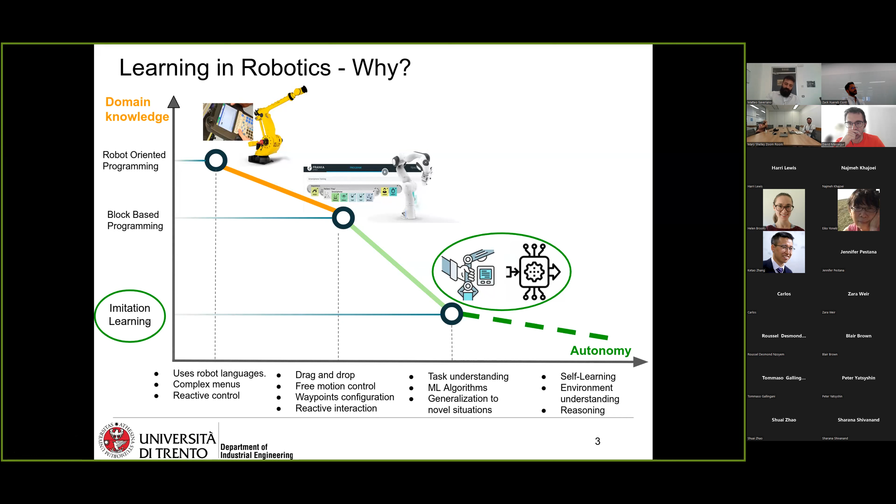This is basically the domain where learning starts to be fundamental in order to increase autonomy without increasing the domain expert knowledge. In this area, I place myself in the imitation learning community, also called programming by demonstration in our field. So then why geometry aware imitation learning?

Well, the answer is pretty easy. We are dealing with robots, and there are many types of data in robotics that do not belong to the Euclidean space. Position is the typical quantity you can treat as Euclidean type of data, because it is, but already if you move to orientation, then it's not anymore. Orientation lives on its own space. Similarly, you have other quantities like inertia, impedance, and manipulability that belong to symmetric and positive definite matrices.

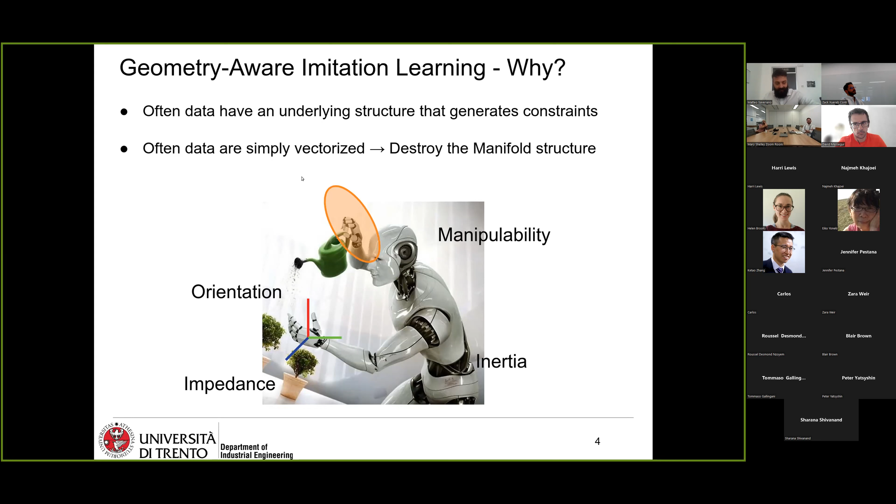What was in the past, at least in the imitation learning community, the way of dealing with learning and retrieving from this data was, okay, let's just vectorize this data, and then we do some post-processing in order to restore the geometric constraint or the manifold structure that a very raw vectorization of this quantity will, of course, completely destroy.

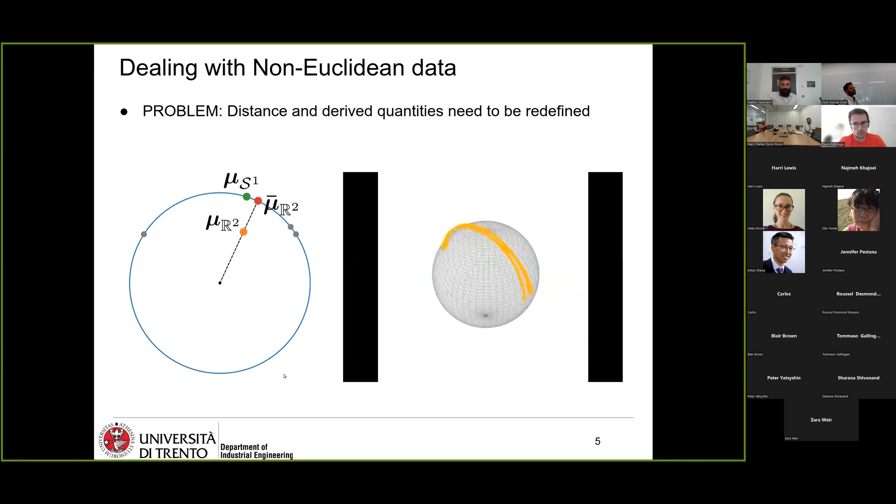To better understand this, we have a small video example here. Let's assume that our points live on a circle, this blue circle here, and then we have these dots here, the gray ones. We want to compute something simple, the mean, indicated with mu, which is the basic of many probabilistic-based approaches in machine learning.

Then what happens is, if we calculate the mean treating these points as belonging to R2, the Euclidean space, more or less we end up here. And then we can simply realize that this point is too close to the center of the circle to be a real one. So what we can do, we can rescale this point, pushing it back on the circle where originally it was.

And then we end up here. But if we calculate the mean using a proper concept of distance that preserves the fact that these points are on this circle, we may end up here. So every time we treat Riemannian data as Euclidean, and then try to do some post-processing to push back on the manifold, we introduce some inaccuracies.

And of course, if this is used to generate robot trajectory, and we propagate this error through our algorithm, we end up with something that may easily go out of distribution very quickly. So I show the video again here, and you see the problem is this: two points in the Euclidean space, or two trajectories are here, and if they have to stay on the manifold, we have to deform the space in order to let them work on the manifold.

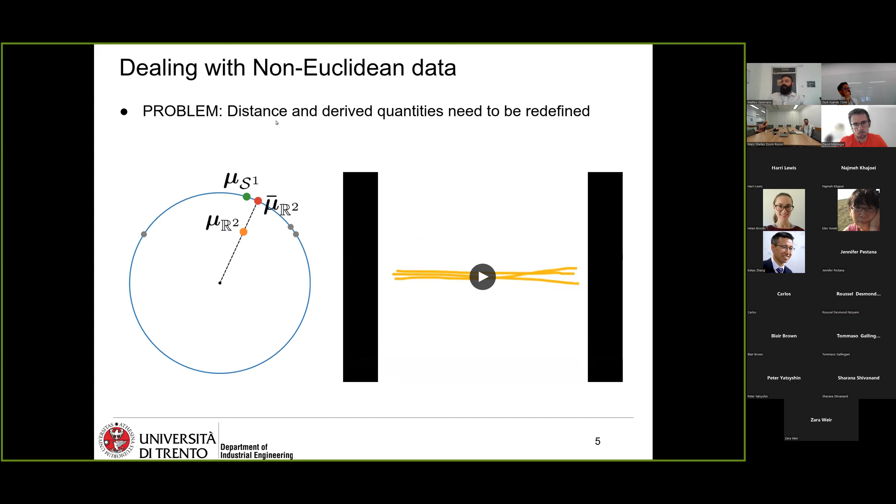So this means that if we want to properly deal with Riemannian data, we should redefine, first of all, the concept of distance and use proper Riemannian distance and all the derived quantities. So the solution is to use the proper tools that have been developed by mathematicians in the framework of Riemannian geometry, also called sometimes differential geometry.

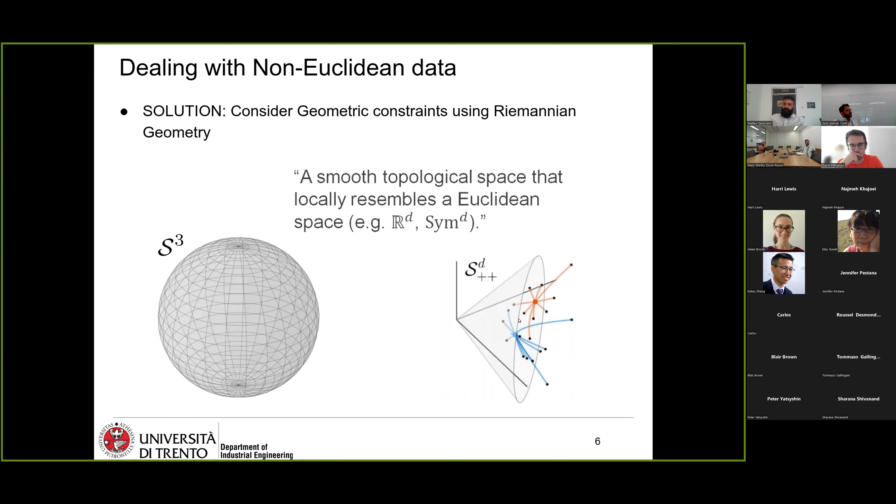A Riemannian manifold is a very general concept. It's a topological space equipped with a metric, so with a distance function. The type of distance function defines the property of the manifold, and it's not uniquely defined, but there are some distances that give nicer properties and are predominant in the manifold. Here on the left, you see a sphere embedded in the 3-dimensional space. This is the manifold where orientation lives, and, for example, unit quaternions. And here on the right, you see the cone that contains symmetric and positive definite matrices.

Okay, so let's start giving some elements of Riemannian geometry now in order to understand how we can deal with this data. As I said, a manifold is actually locally isomorphic to the Euclidean space. We can, a little bit improperly, say with an abuse of notation, that it's locally Euclidean, even if this doesn't mean much from a rigorous mathematical point of view, but I think you get the sense.

Actually, on each point on the manifold, you can define the so-called tangent space, which here it's pretty easy to depict, where basically you can define a coordinate frame and treat your quantities as if they were Euclidean. In order to do so, we need some operations that let us move from the manifold to the tangent space and back.

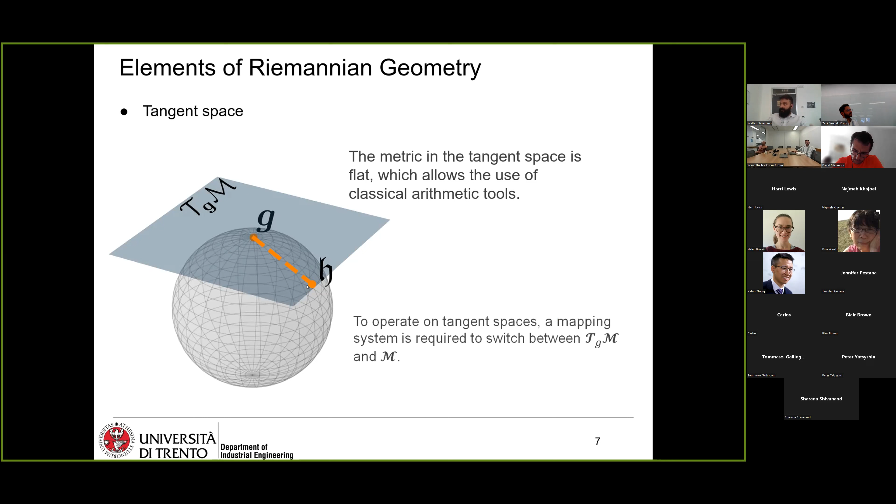These operations are usually called the exponential map and the logarithmic map. The exponential map is the one that pushes a point from tangent space onto the manifold, and the opposite is the logarithmic map that lifts a point from the manifold to the tangent space.

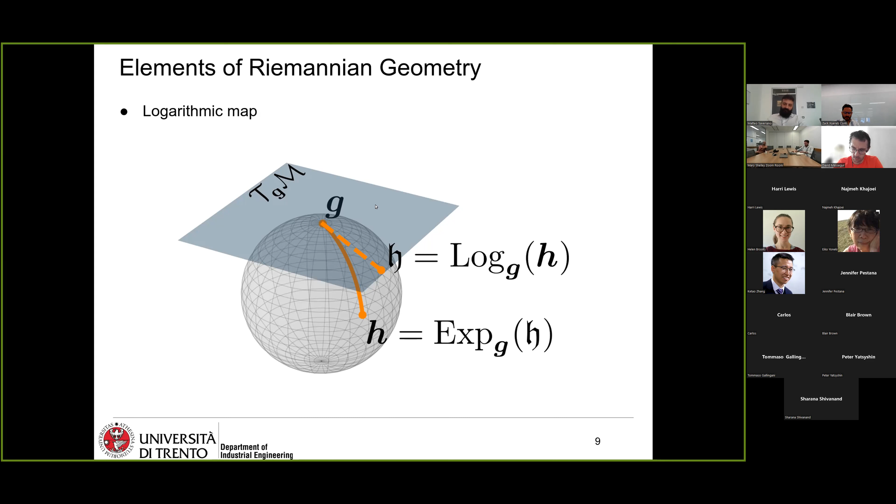And another important concept is that of parallel transport. Why do we need parallel transport? Because actually everything we will build in a moment is based on placing a tangent space at some point, then lifting the nearby data onto the tangent space, using Euclidean tools to learn in the proximity of the tangent space, and then pushing back the data onto the manifold, and then moving on to the tangent space.

And then when we have to compare two vectors that are projected into two different tangent spaces, we cannot just sum them up or subtract them, but we need to move one vector from one tangent space to the other. So in the end, we need all the vectors represented in the same tangent space in order to perform operations.

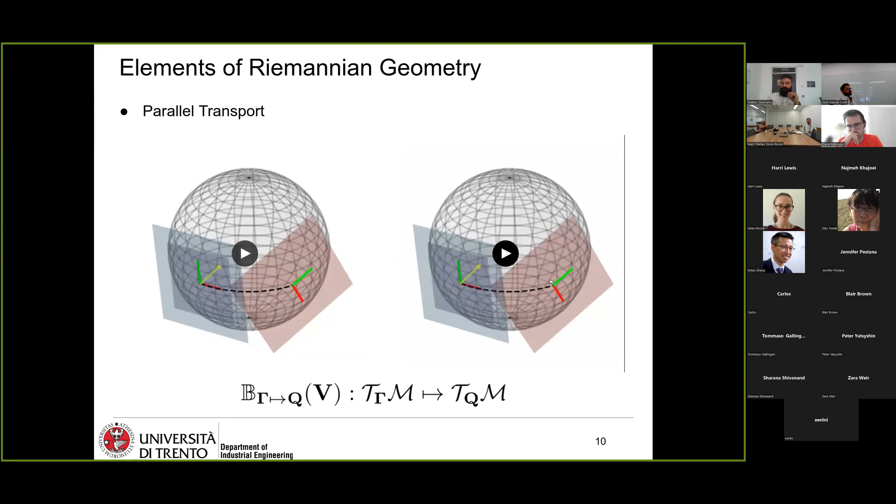Otherwise, basically this happens. Let me show once again. If we just move with typical Euclidean tools from one tangent space to another, you see a vector that stays here is kind of completely changed, while parallel transport is a way to transfer the vector properly, keeping the orientation it has. So you move along a geodesic connecting the two points where the tangent spaces are placed, while preserving directionality. We need this kind of operation, and it can be defined on any Riemannian manifold.

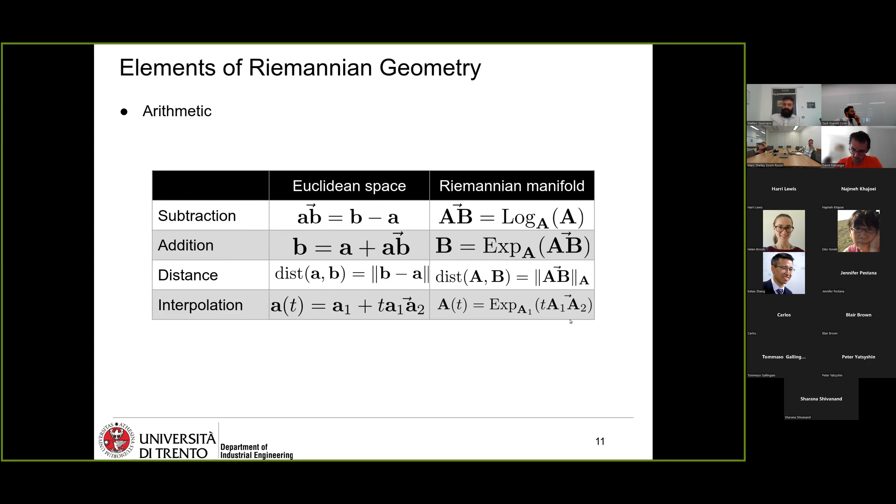This is just to summarize basic arithmetic on manifolds. So the logarithmic map can be related to the concept of difference in Euclidean space. The exponential map is actually an addition, and the concept of distance, of course, has to be redefined to be on the manifold. Interpolation is also important, and it can be achieved through the exponential mapping, multiplying by time t this difference of points in the tangent space.

Okay, so now we have introduced our machinery, the Riemannian manifold machinery. Let's now have a look at how we can use that framework in typical robotic problems. A first example is the famous, at least in the imitation learning community, framework called dynamic movement primitives, introduced in the early 2000s by Auke Ijspeert, Stefan Schaal, and others, working at that time at the University of Southern California.

So what was their idea? Basically, they wanted to reproduce demonstrations and generate something feasible for the robot to execute, so sufficiently smooth—that's why they went to second-order dynamics—and preserve stability, because very often in robotics you want to reach a certain position, a certain configuration, and keep it. So they had the idea: let's start with the simplest dynamics we can consider, a second order spring-damper mass system with unitary mass.

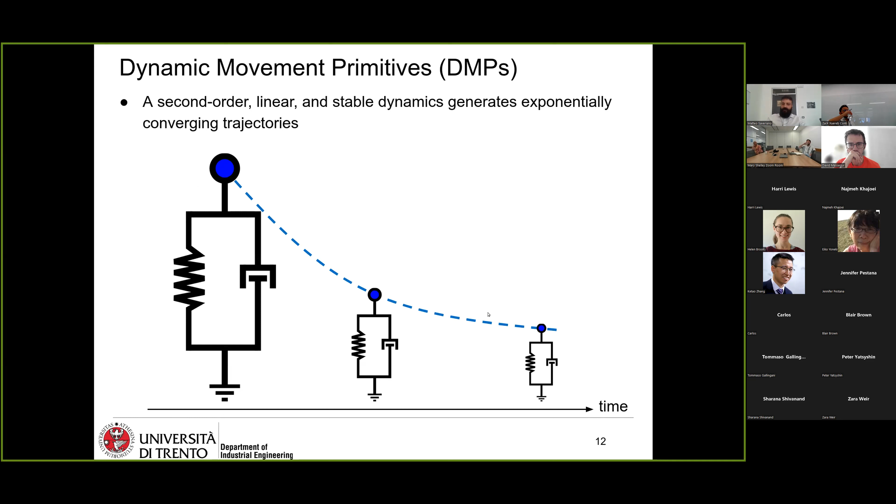This is a very famous physical model. Everyone has probably had to deal with this in a basic physics course. This is second-order dynamics, linear, asymptotically stable, meaning that from each point I can pull this side of the spring-damper system, and sooner or later it will converge. Depending on the value of the spring and the damping, I can have oscillations, or an exponentially decaying trajectory—what we call in control theory a critically damped system—that converges towards an equilibrium.

This is pretty nice, but of course quite limited. So the idea of these researchers was: let's add to this simple system a force, a nonlinear forcing term learned from demonstration, in order to execute arbitrary trajectories, and then finally retrieve asymptotic convergence by killing this force—it's multiplied by a vanishing term, so that with time it vanishes, and the system retrieves asymptotic stability towards the desired goal.

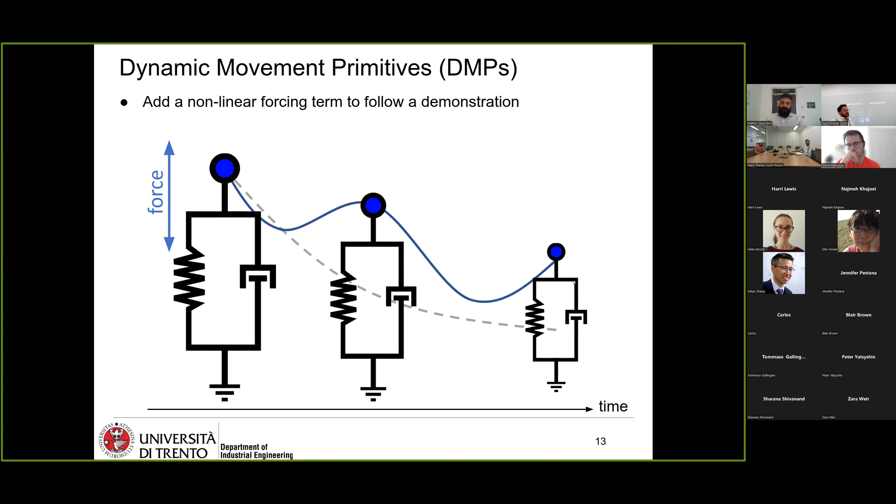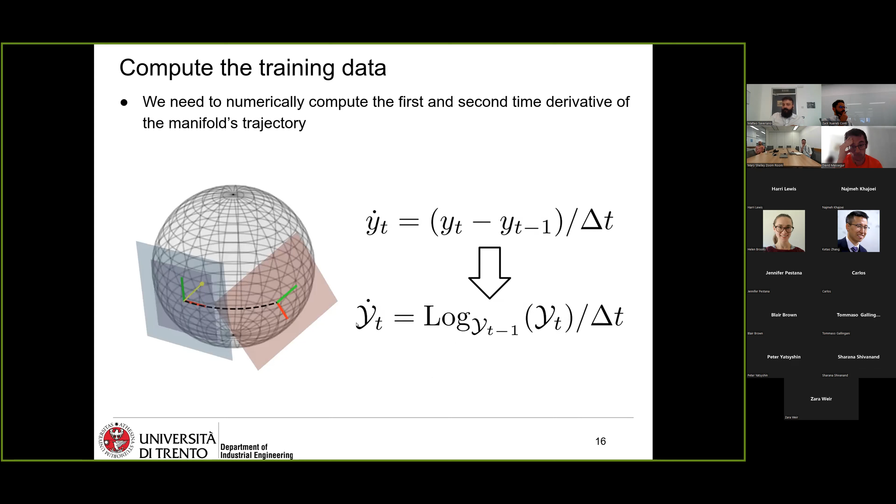Then you can calculate the velocity, and once you have these velocities, you can just apply Euclidean tools to calculate the second derivative, and with this, learn your DMP.

One of the interesting features of DMP is the possibility to change the goal on the fly. Imagine you have a camera tracking an object you want to catch, and you have learned some stereotypical motion, a template trajectory reaching a certain goal G, but this goal is changing on the fly. With DMP, you can define a linear system that, with a time-depending gain, changes the goal from G to the new one smoothly.

The equivalent of this on a manifold is again a dynamical system that, instead of this difference, considers the logarithmic map, in this case placed at G, of G new, and then calculates G dot. You can also change this—the trick here is that you can usually interchange these two for many manifolds, smooth manifolds.

And basically, if you change this one, then you have to do the parallel transport minus the parallel transport thing, in order to interchange these two. So this is where actually the parallel transport comes into the game.

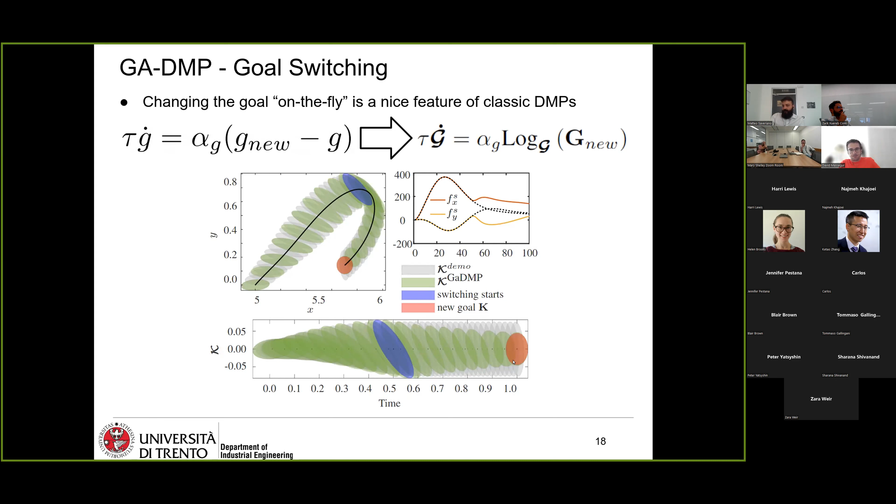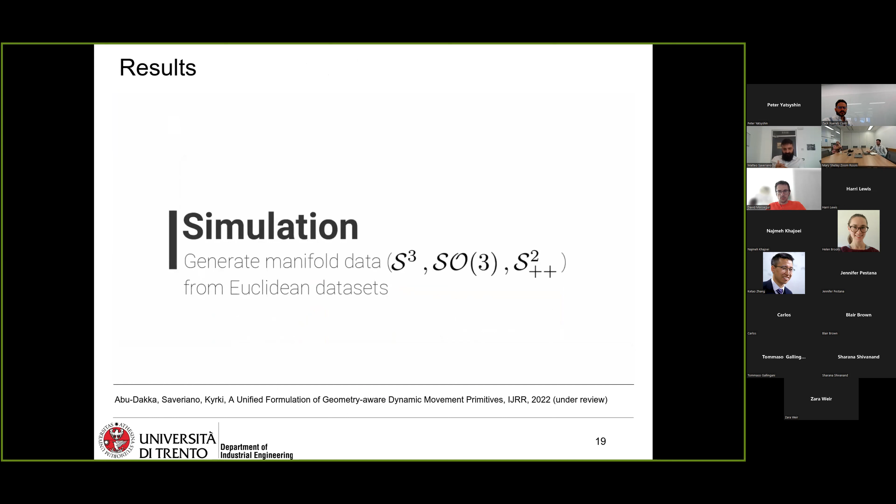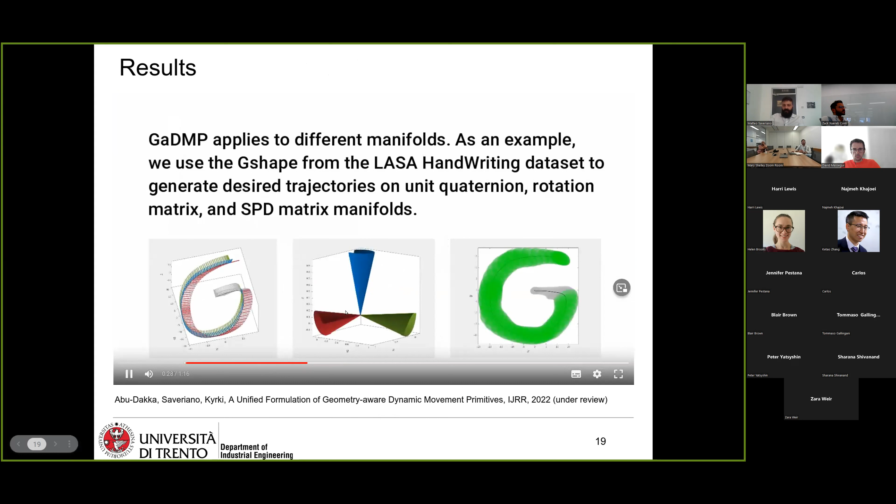Okay, it's time now to see a little bit of results. So we have this paper under review now, where actually we describe what I have told you so far, this geometry-aware movement primitive. So here you see some Cartesian letters, and then we have transformed this pretty simply projected on manifolds. So here on the left is quaternion, here is rotational matrix, and on the right you see SPD matrices. So how you can reproduce that, and then some experiments.

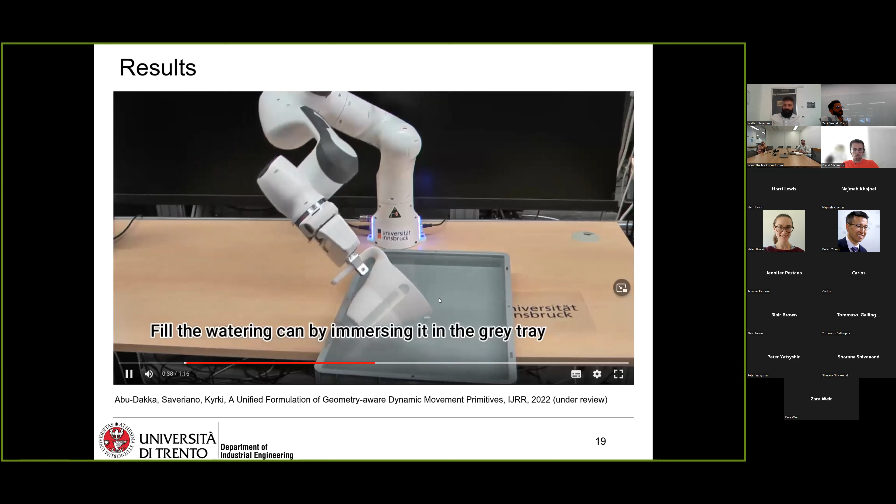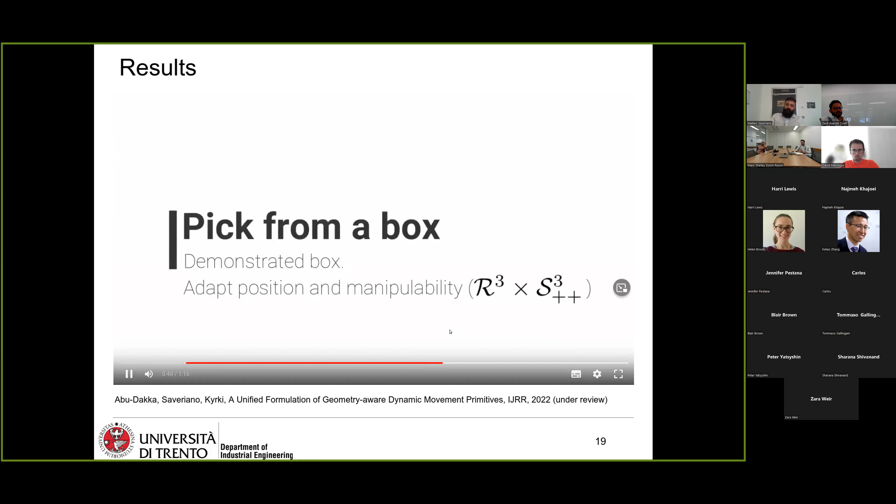So now the robot here, for example, has to fill this watering can, and then it can control basically position, orientation, and stiffness. And in the other case, the robot has to pick from a box.

So we have instructed the robot to actually enter this box. So we control, in this case, the position and the manipulability, that is actually an SPD matrix, as a secondary task. And when we have to enter another box, we command the position. And to prevent that the robot deform the trajectory too much, we have this secondary task. So the robot tries to keep actually its posture, okay? So the posture that has been demonstrated during the motion, in order to do this basically type of motion.

So you see that here, this is the demonstration. And actually, when we try a little bit to generalize, we try to keep the configuration via the manipulability as a secondary task of the robot. And then we have this.

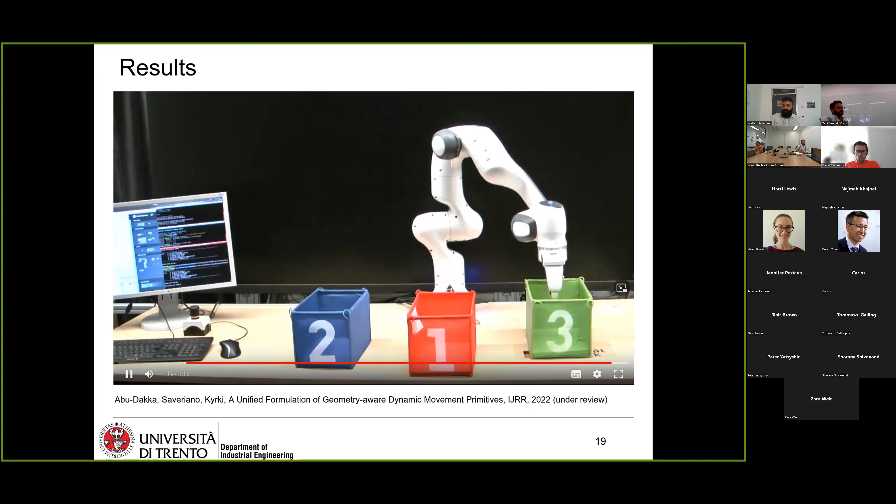And otherwise, I don't know, the robot could, of course, hit the box and so on, because of non-constrained motion.

Okay, so that was basically for discrete motions, so motion that basically have start and end, but many human tasks are of periodic nature. If you imagine, I don't know, sewing, for example, or something that requires that you pass again and again through the same point and generate a periodic trajectory.

Of course, the DMP framework was already extended to consider these periodic tasks. It's formally the same. Now, instead of a clock signal, we have this phase variable that basically goes from 0 to 2 pi and then is reset, so like a sawtooth. And the forcing term is, of course, again a little bit different. So we have R, that is the amplitude of our oscillation. And then here now we have actually von Mises basis functions that basically represent our periodic signal, like Gaussian over a circle.

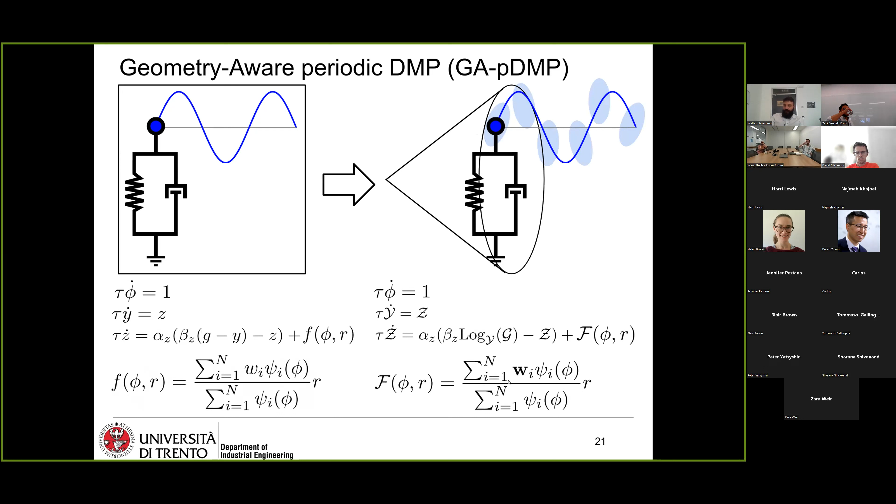And the extension to the Riemannian-based data, it's again pretty simple, just substituting here the difference with the logarithmic map, and all the rest is formally the same. Of course, we have to consider now different types of vectorized data, but more or less the changes are not dramatic.

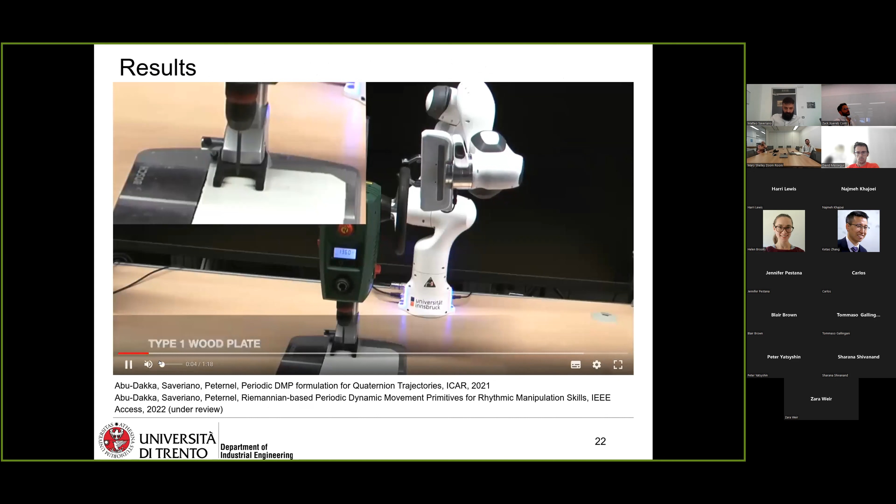Here some results, partially published, partially not, that basically show this is a robot operating a drilling machine. So we have actually shown one demonstration and then made it periodic. So here we control again position, orientation and stiffness to actually guarantee a smooth interaction while manipulating this.

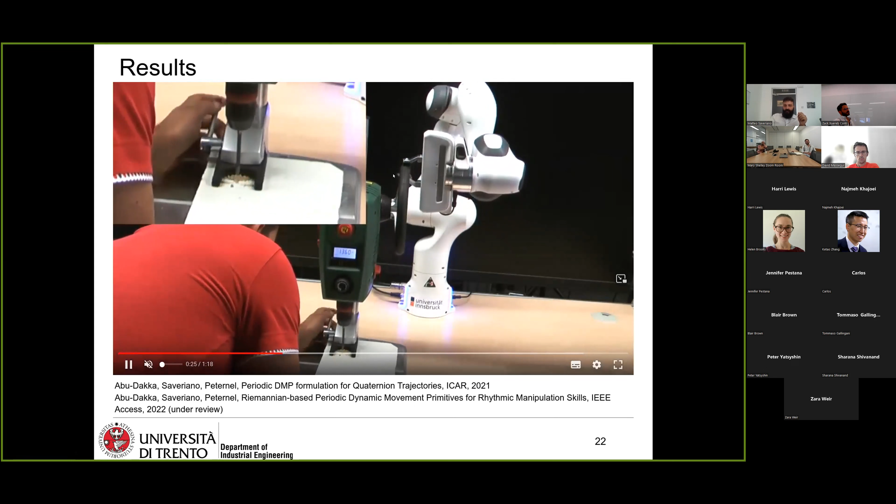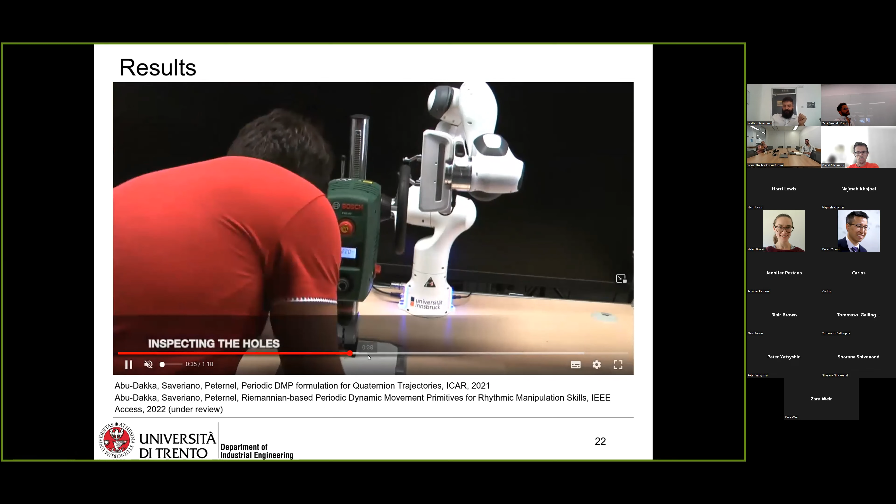So we basically define a variable stiffness impedance controller here, and then we can basically perform multiple holes. And you see, actually it's me now showing the holes and inspecting somehow the material.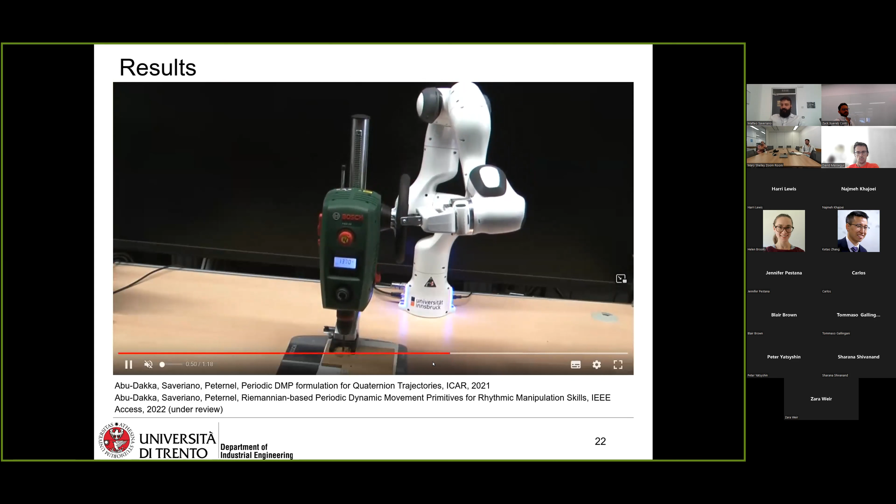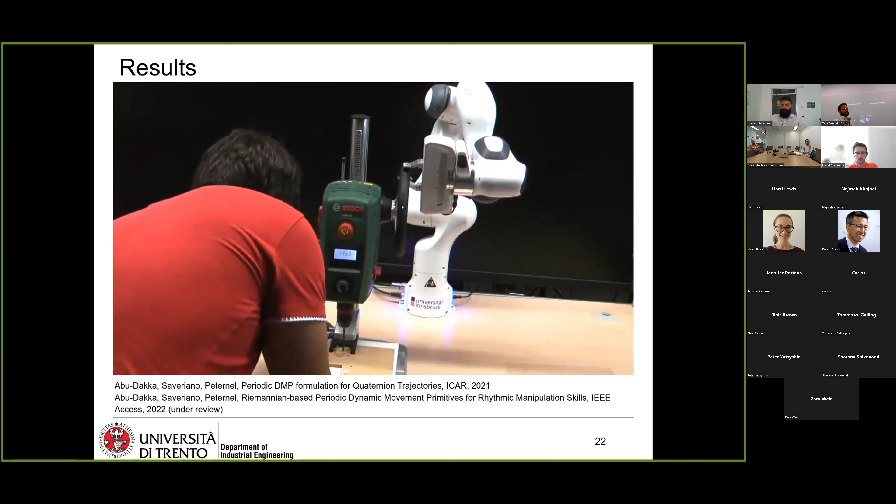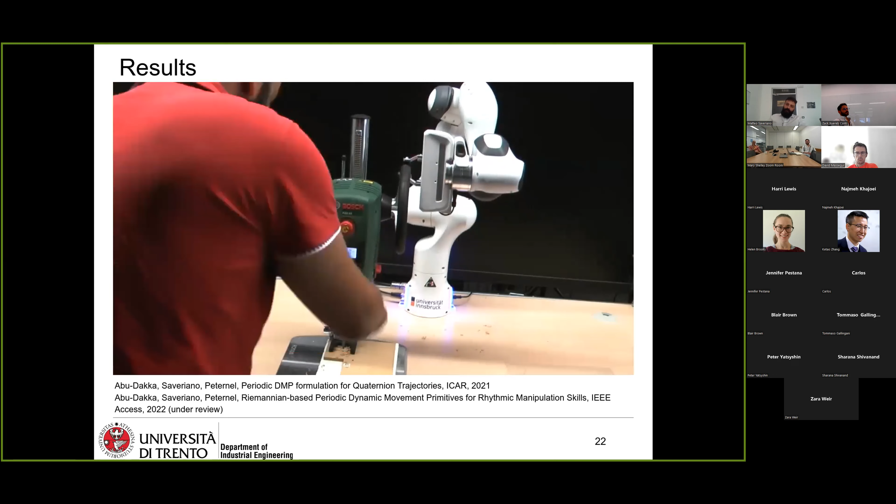We can also change a little bit the material and the thickness, and we have basically a simple estimator, right? So we just estimate the error in tracking the trajectory and try to push more if the error is actually large. So pretty simple thing, and it helps us, in this case, to make holes in a material that is a different type of wood and with a different depth.

So again, we can see that the robot was successfully making the holes.

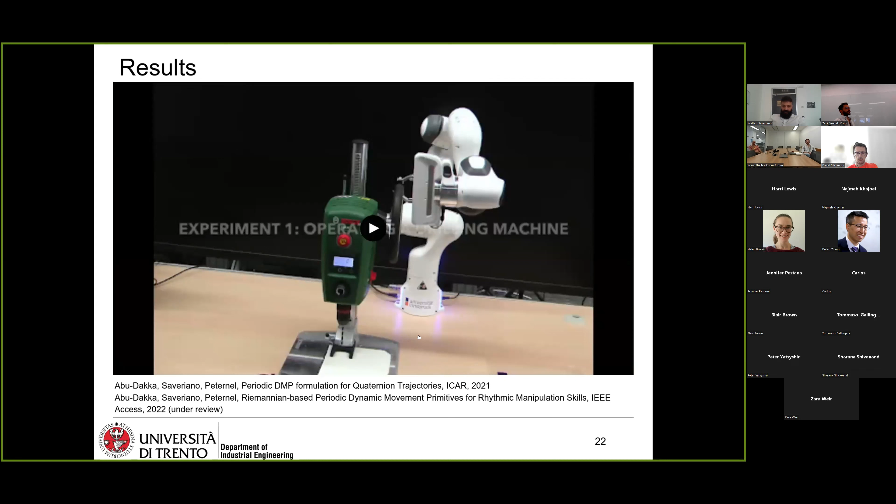Next video, it's a bit nicer. I'll put the audio on again to give you the feeling. This is my colleague, Luca Peternel from University of Delft.

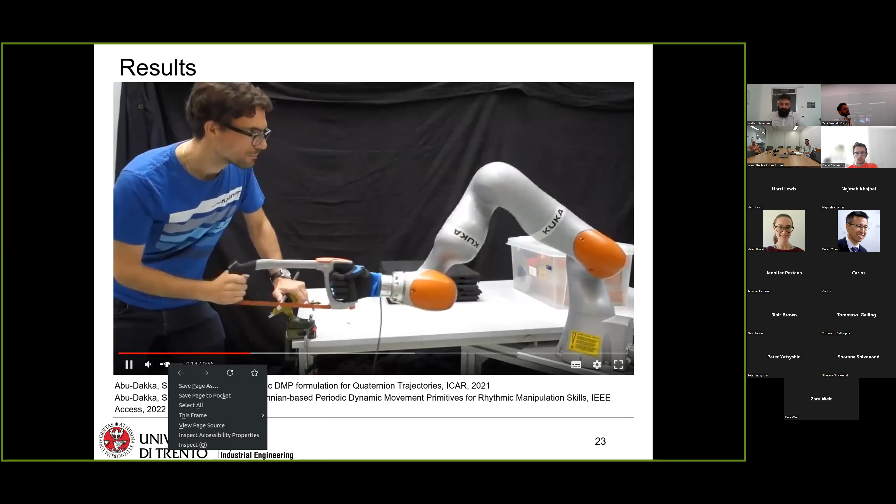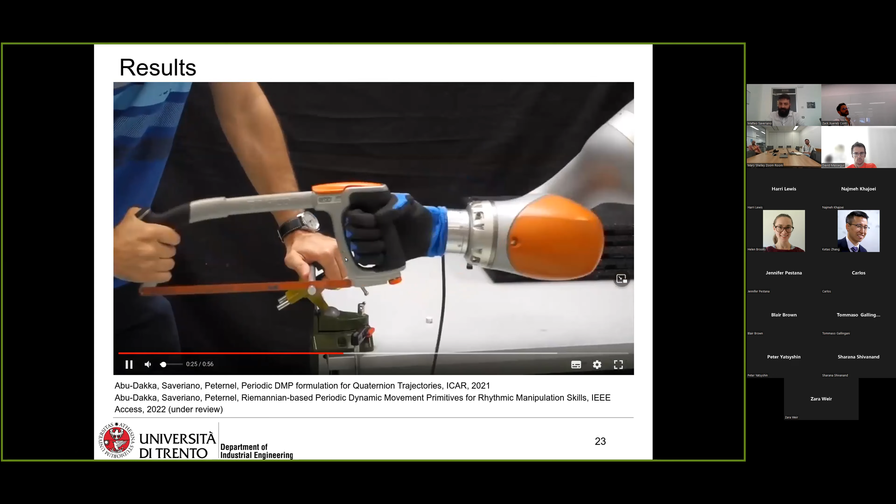You see here we are controlling the motion in this direction and the stiffness in order to effectively do this sawing task together with the human. So push the human in one direction and pull in the other, not being passive.

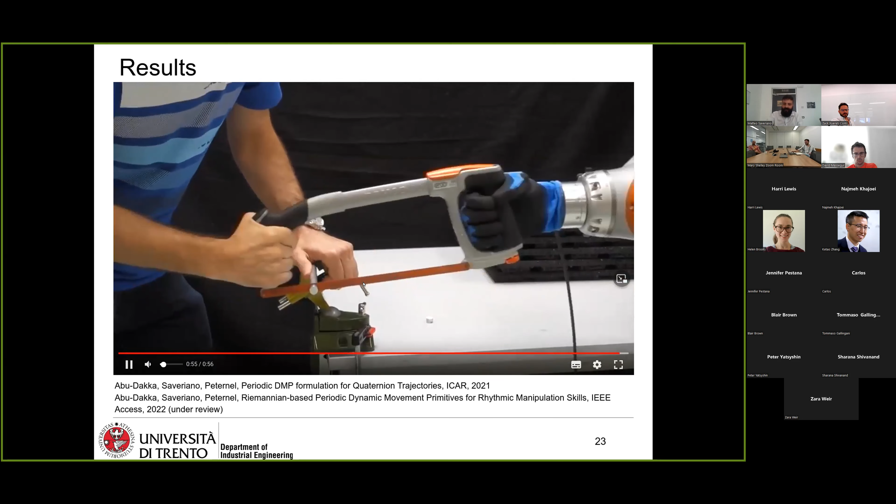In a moment you'll see this was a real task, cutting down this piece of steel together with the robot. Again, this task was controlling the position, but also the stiffness, in order to ensure contact and actually support the human while cutting, not just passively following it.

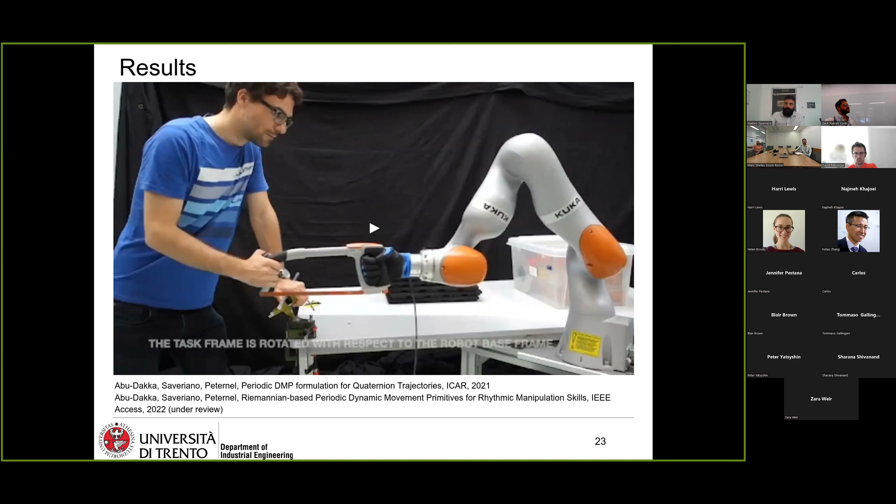Okay, so we're going towards the last part of my presentation. What we've seen so far with dynamic movement primitives is a possibility to learn a time-driven dynamics, where time plays a fundamental role in killing out the nonlinearities in order to retrieve stability. This means we have hyperparameters to tune to get a motion that, in the discrete case, prevents overshoot, or prevents killing the nonlinear forcing term too early so you just linearly converge to your target.

Then in the last 10 years or so, there was a lot of effort to learn stable and autonomous dynamical systems that do not depend on time input to generate motion, where you learn an entire vector field, and potentially generalize into areas of the state space where you don't have demonstrations, because the vector field has a certain shape even far from the demonstrations. The idea is nice, and I developed a few approaches in this field that I'm not going to mention today.

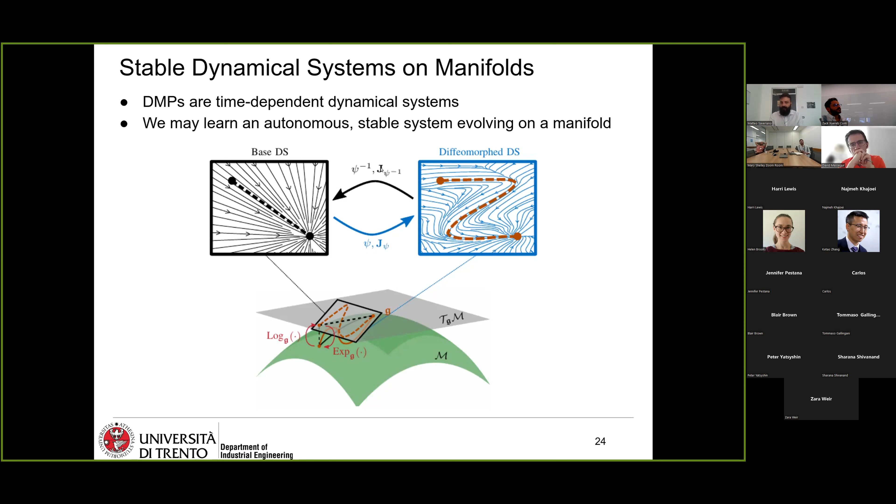From the demonstration we can learn a mapping that transforms this vector field into the one on the right, through the mapping and its Jacobian - the derivative with respect to the state. This is guaranteed to preserve stability, so it's time independent and stable. In case we have to go back, we can. The mapping has to be smooth, because we calculate the derivative, invertible, and with continuous inverse, because we also have to invert the Jacobian matrix. These are the properties of a diffeomorphism, or diffeomorphic mapping.

Just to give a few hints: this is a geodesic system, placing the tangent space at the current point, or via transformation, at the goal. For a few manifolds it's similar if you consider parallel transport in between. Then, the equivalent of a linear dynamics - multiplied by a scalar - gives you the velocity.

This is the so-called global coordinate, where you define a velocity field and then start to integrate it. This creates, from an initial point to the goal, a piecewise path - a piece of geodesic motion. That's the simplest thing you can do on a manifold, and the simplest dynamics you can describe on your manifold.

What you can do, as I said, from your data projected in the tangent space, is learn a diffeomorphic mapping that takes as input this general global coordinate log x, multiplies it by the Jacobian computed at the same point and gain, and gives you a dynamics that, for example here, follows this blue line. Learning this diffeomorphism has been studied quite a lot.

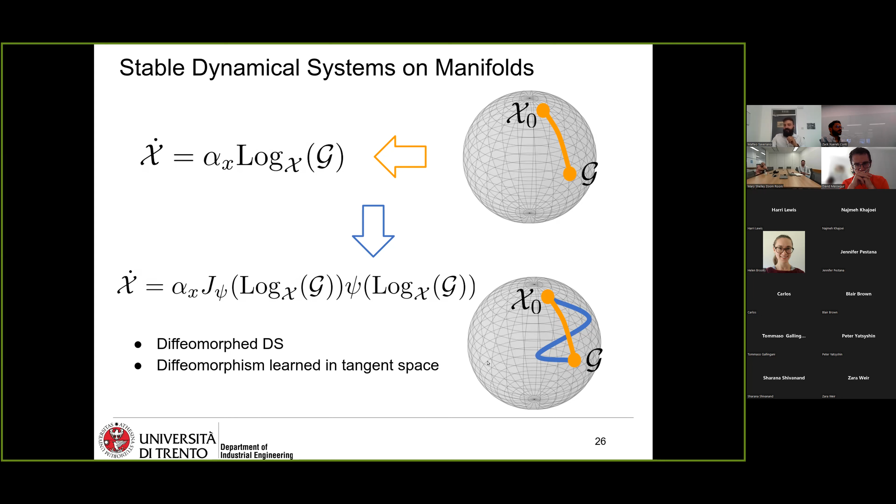In a paper under review, we show that this is more data efficient, meaning we can accurately learn this diffeomorphism from few data, and also time efficient, because training normalizing flows is quite intensive. You also have fewer hyperparameters. In a Gaussian mixture model, you mostly have one hyperparameter, the number of Gaussian components, which with a little experience you can choose by hand, or simply do a grid search among reasonable values. This was not the same for deep neural networks. We have another paper in the pipeline using deep neural networks, but we had to do a proper hyperparameter search on the cluster to get good results.

So this is the type of experiments we have done. This is our dataset, which I mentioned before. I'll show the link later where you can download it. It's an existing dataset that we basically projected onto orientation and SPD manifolds, nothing too complex.

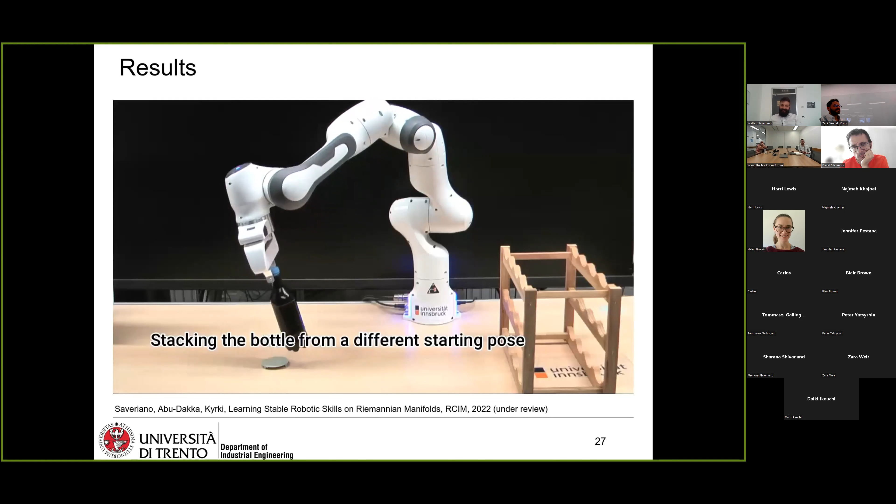This is an example where we were controlling position and orientation of the robot to perform this wine stacking. One criticism was that I could have chosen a slightly smaller bottle, because it's really fitting quite precisely, but that's it.

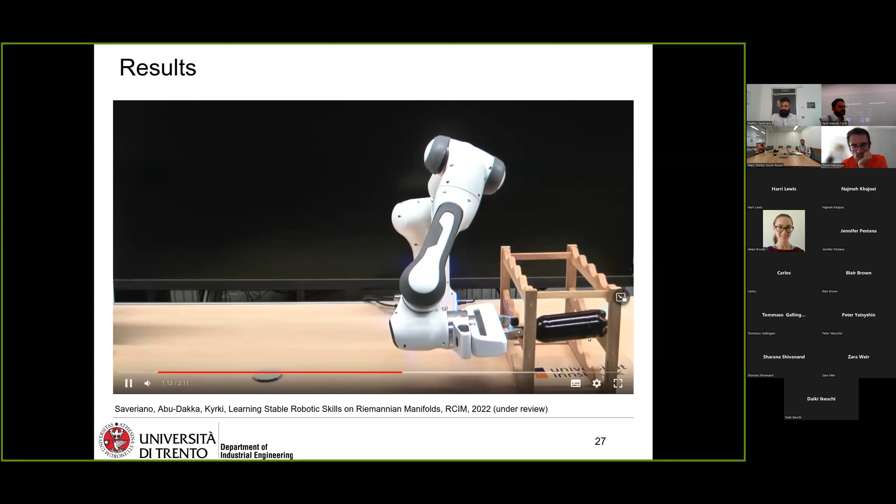Now we change the goal. The demonstration was always done reaching the same goal, and then we can change the goal, because this is one of the properties of dynamical systems, converging towards another goal. I hope the video is not too slow due to the lag in the connection. Here is yet another goal, and now we also change the orientation of the rack, and still perform the same task successfully.

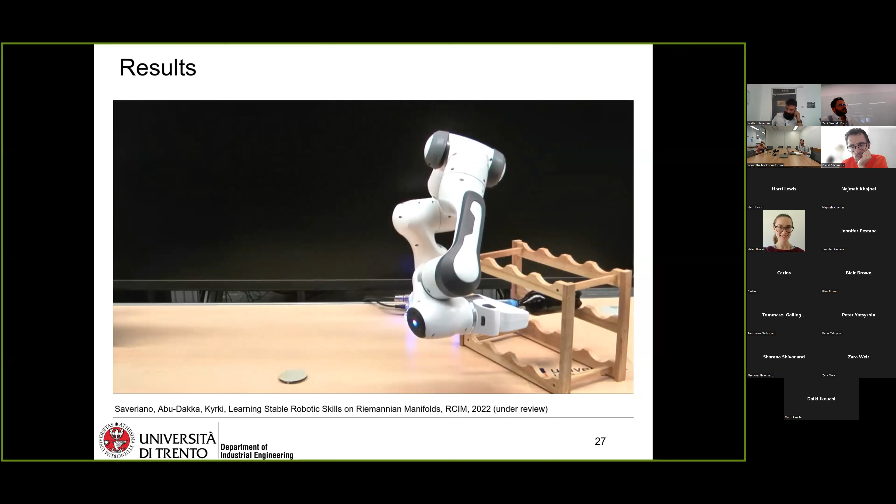There is of course a large tolerance in this, but still you have to be somehow there, otherwise you don't complete the task.

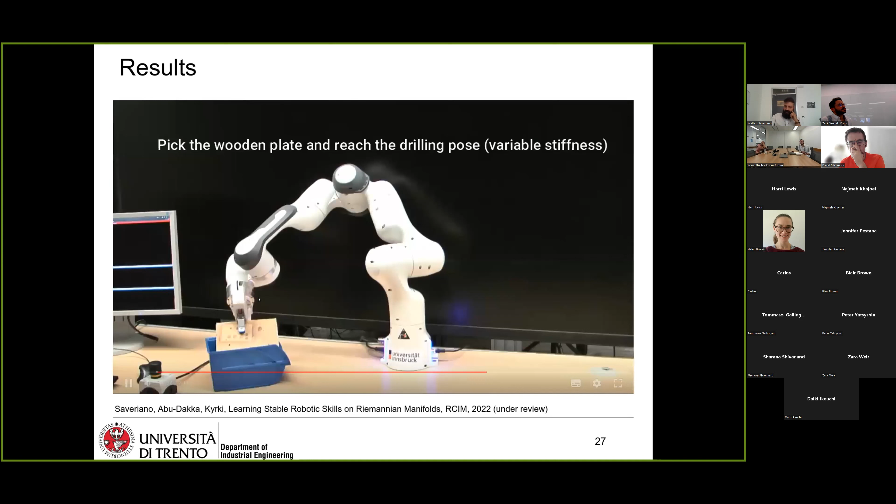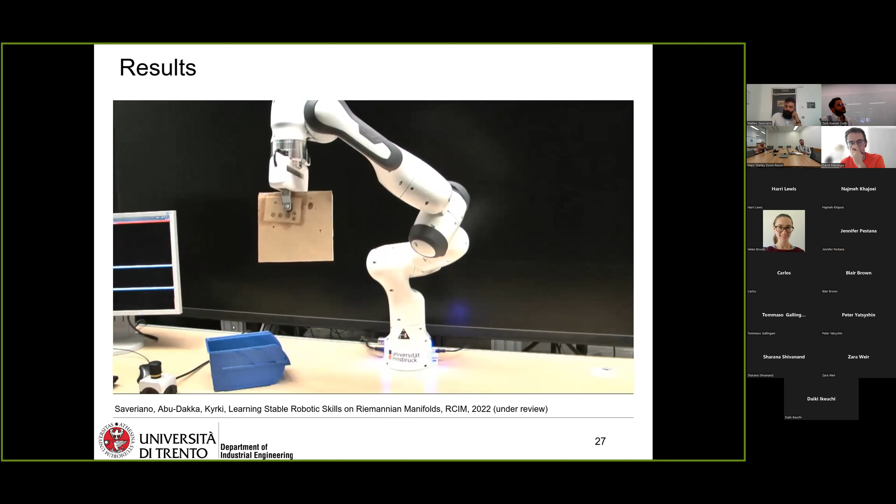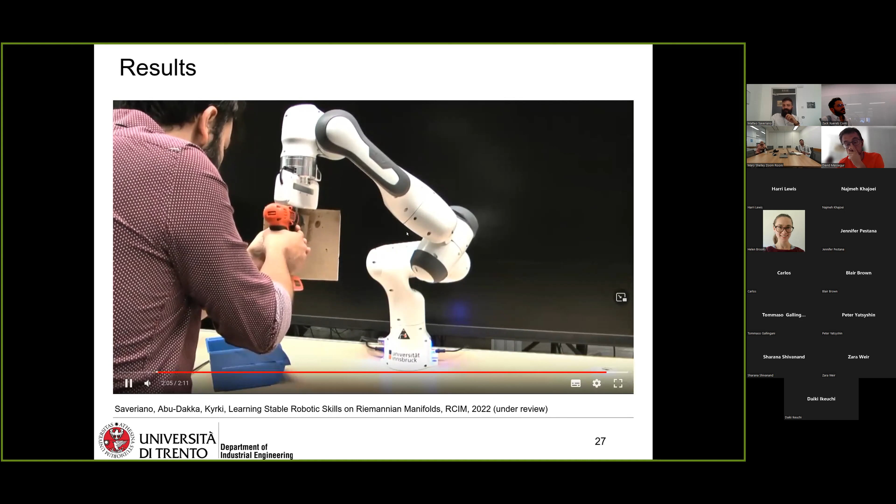This is a cooperative drilling task. Here we are basically controlling the stiffness to be low while approaching the drilling pose, and then we have high stiffness, so we have a variable stiffness profile. The robot was compliant with low stiffness at the beginning, because you have to rotate and lift this piece from the container, and since this piece of wood is relatively light you have to unstack it a little bit smoothly due to the compliance, and now it becomes stiff, so you can drill and the robot is supportive. Of course this is not an industrial robot, so there is already some elasticity in the joints, so even at maximum stiffness the robot moves a little, but still you can do this type of task.

Just to summarize, today I presented a bit of the Riemannian geometry framework and some ways of extending traditional imitation learning or programming by demonstration frameworks to the Riemannian manifold. We have started to release our code, even though the papers are not published yet, just to serve the community, with a MATLAB implementation. This is also a long story - I'm trying to move from MATLAB towards Python, but my proficiency level is still kind of similar, so Python is finally overtaking.

This one has been done in Python, and it's basically the geometry-aware DMP that you can download and try. We have tested 4 different manifolds: symmetric and positive definite, unit quaternions, rotation matrix, and SE3, which is the composite manifold where you have position and orientation. We will probably release some other code, but you can check or email me if you're interested, and I can share a development version, even if not super clean, so you can try it.

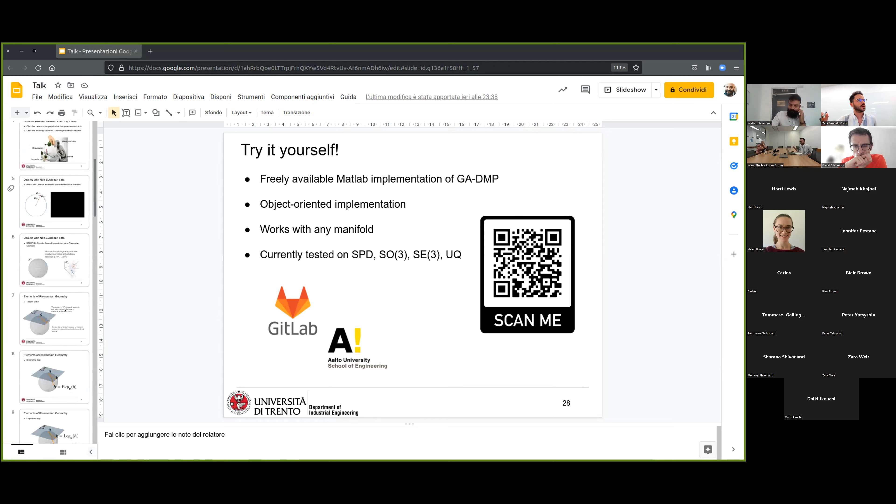In the meantime I have one or two questions. So what I wanted to ask primarily was, when you started to talk about the Riemannian manifold geometry, you make an assumption right there, assuming this kind of spherical manifold. But it is a manifold, right? So what is the influence of that assumption on the work, since there are other kinds of manifolds you could choose?

Well, so far we have considered not only the sphere, but also the cone that describes symmetric and positive definite matrices according to the affine invariant distance, one type of distance on the SPD space. These are pretty different. The sphere has the problem of the top and bottom hemisphere, where you have antipodality problems. If you consider this to represent robot orientation, a point on the hemisphere and its conjugate represent the same orientation. This is a typical problem, and usually in robotics what you do is force your data to be in one of the two hemispheres. In this other type of manifold, you don't have this problem, points are uniquely defined. But you have two problems: the manifold is unbounded, it's non-compact, and you also have this point 0,0,0 that creates problems, like zero divisions.

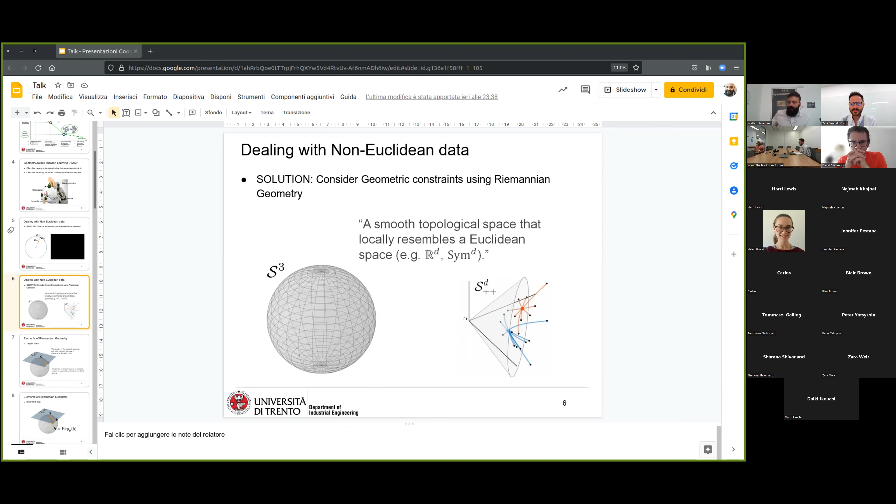For the non-compactness, it's okay because you have a trajectory, so your trajectory will be compact anyway, you will stay somewhere, and we are forcing our system to be stable, meaning it will not diverge or reach a point at infinity, which is good. For the zero point, we don't have a real solution now, apart from staying far from it. But the approach is rather general, apart from properly defining these mappings, the logarithmic map and exponential map, that you define at each point on the manifold. What we haven't tried is that in some complex manifolds, the functional expression of these maps can even change. On the sphere you have the same functional expression, just placed differently, giving different tangent spaces because it's a function evaluated at a different point. But for some manifolds even the function changes, and this is something we are still investigating.

And my second question: if you have a different robot with different specs, can you map this onto the manifold, or can you reuse the information from the previous robot, since there are similarities? Yes, similar manifolds, this is something I'm working on right now but for a different application, so it's definitely interesting for me as well. There are obvious geometry transformations between similar state spaces.

Of course, apart from the geometry, what can be transferred relatively easily is the manipulability. The manipulability basically describes in which direction you can move more freely and in which direction your motion is constrained.

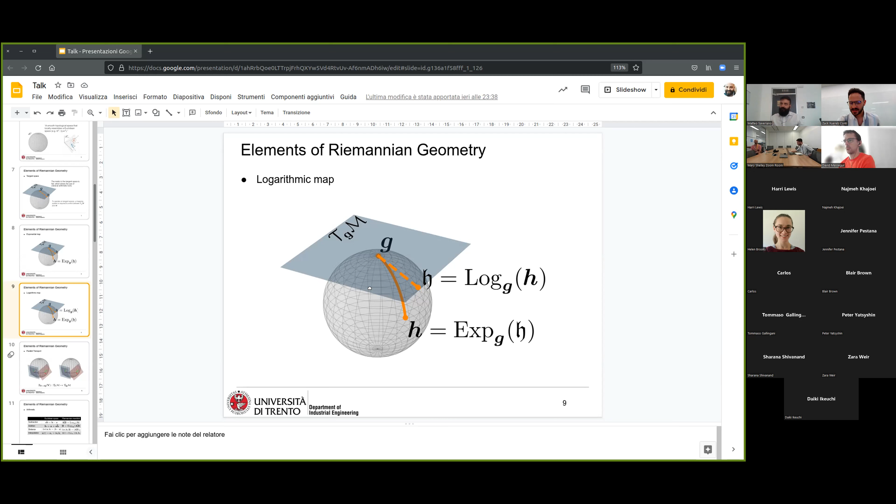Okay, very cool. Thank you. Are there any questions from the audience? Before, Peter seemed to have a pressing question. I wonder if someone raised... Yes, it was me. It was me. Thank you very much, Zach. I'm sorry, I don't want to put you on the spot. No, thank you.

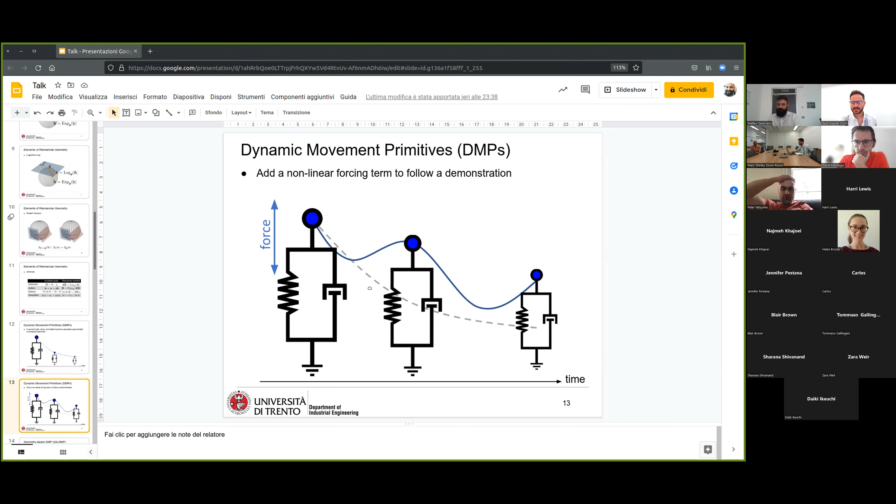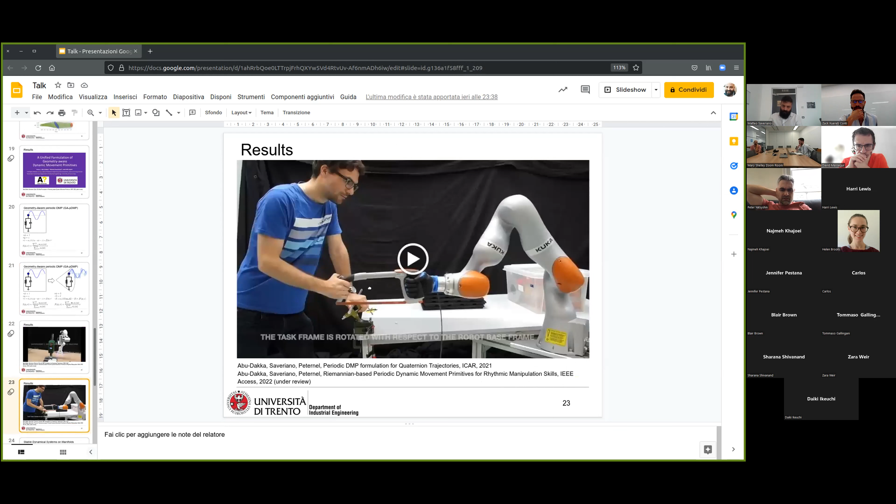I had a very naive and silly question. In the mapping, when you project your dynamical system onto a manifold, it almost seemed like it's a little bit linear, the system. Does it matter? Am I wrong? You mean here? Yes, and in the actual equations, they seemed to be linear in G. Is that an important factor?

Well, it is not linear. I mean, this is like the equivalent of a linear system on the manifold. And of course, a linear system in Euclidean space generates straight lines. This generates a piece of geodesic. So the only thing is that you adhere to the manifold geometry, and whatever your manifold is, it will generate a path that stays on the manifold.

I mean, this is good because it's guaranteed to be stable. We can use some Lyapunov theory to prove that you will always converge to the goal and so on. But this is only part of the equation. Then we want to do, for example, the blue line here. And how we do this, we pass this through a nonlinear function here. That's why I mentioned normalizing flow.

I understand. My question was the underlying physical system in the Euclidean space—can it be highly nonlinear, the underlying dynamical equations? Yes, it can be. In the Euclidean case, and in general, you can learn directly a nonlinear system and enforce some Lyapunov conditions on top of it. This is possible, and then you can pass through this.

For the Euclidean case, I have a paper where I show incremental learning. If I start from a system that is just generating straight lines, and then show a pretty complex path, it takes time to slowly move to converge to that one. While if I was giving something already in that direction, like a piece of a sine function, it was quicker to reach incrementally the other one. So if you start already from a dynamics that gives you what you want, it's clearly beneficial for the learning. Thank you very much, and thank you for your talk.

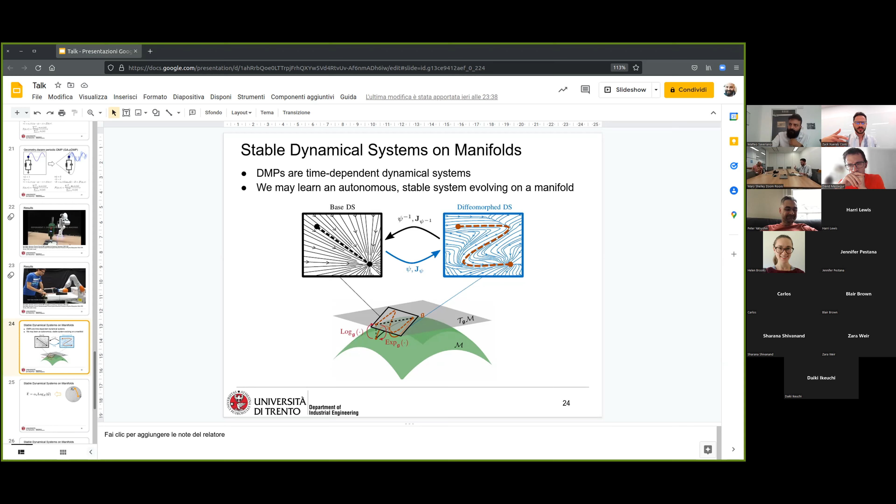That's why I asked earlier about finding transformations between different robots. Exactly, yeah, and I think it's very powerful. I think we're slowly working towards a new kind of machine learning catering for engineering dynamics. I'll be happy to involve you in what we're doing. Your colleague who spoke before you a few weeks ago was also interested in this, so it would be very cool to have a chat, and anyone else who's listening, perhaps.